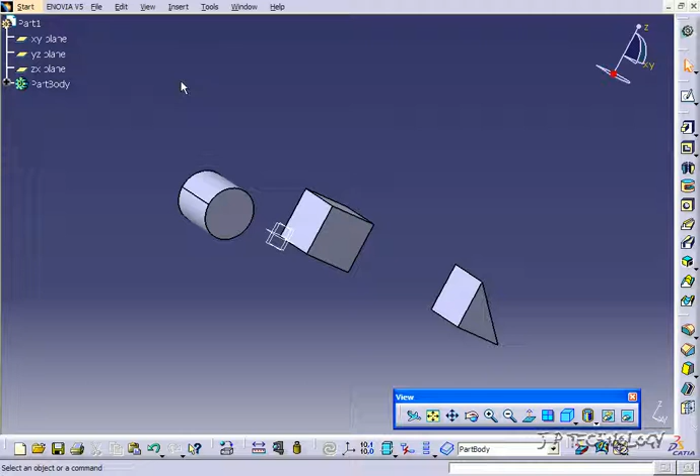This is tutorial number 43, and it covers how to use the drafted fillet pocket feature within Catia V5. To start off, open up tutorial part number 42, which is located on the DVD. Now the drafted fillet pocket feature is found either in your toolbar over here, or if you go to Insert, Sketch Base Feature, your drafted filleted pocket.

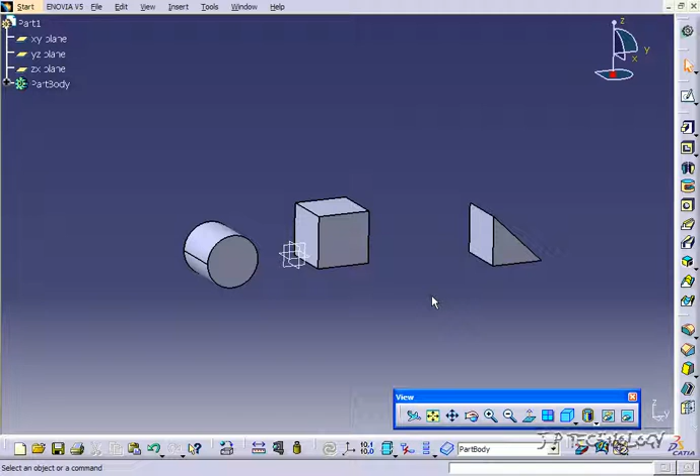Now what we're going to do is we're going to apply this feature to all of these parts here, and just like the previous tutorial on the pad one, the pocket one is going to incorporate a pocket, a fillet, and a draft all in one step with the one sketch. So again, this is going to save you time as it takes one sketch and one feature to complete 3 features all at once. So for the first one, let's click this face here, click Sketch, let's zoom in and let's draw a square.

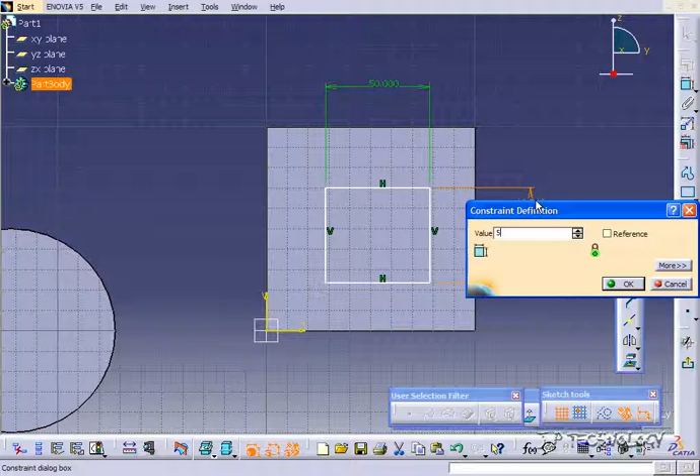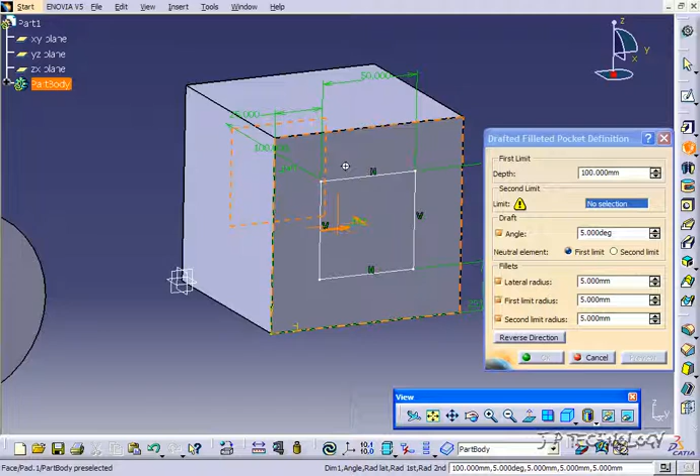And let's dimension the square to 50 by 50. And we'll center it. So it's going to be 25 by 25. So once you have all those dimensions in, let's go back up and let's click the drafted fillet pocket. So let's click it, and then again you're given the same menu as the pad definition. So for the depth, let's put it to 50.

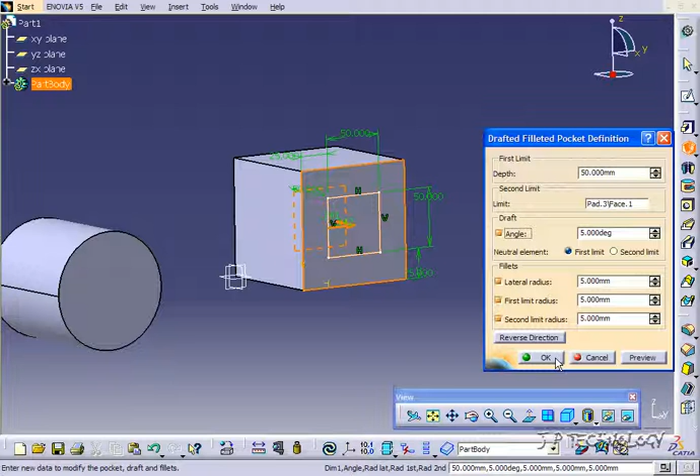For the limit, let's click this face here, and again you're able to toggle the draft and all the fillets on and off. So right now let's put everything on, leave everything at 5 degree and 5 mil, and let's click OK. And you can see that we've been able to cut into the block with a 5 degree draft on it, and all of the edges have fillets.

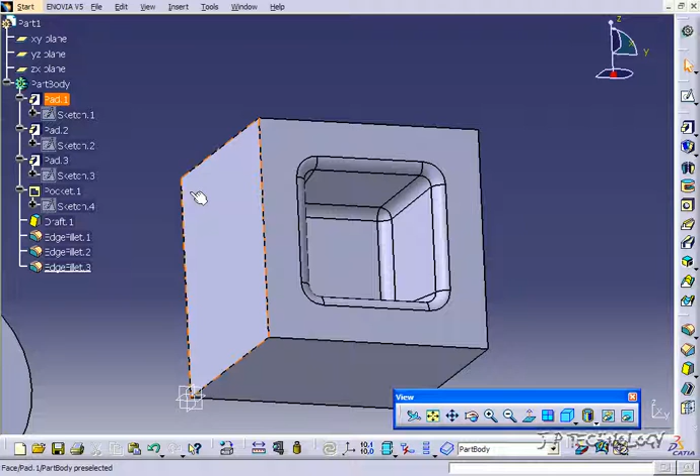Now if you open up the part body, under this pocket here, of course you're going to see the pocket, the draft, and the 3 fillets that we used. So again, we're able to go in and change some dimensions. So let's double click on the draft and let's change the draft angle for this one. Let's put it to 12 degrees. Click OK. And now you can see that it's opened up and we have a 12-degree draft on this pocket.

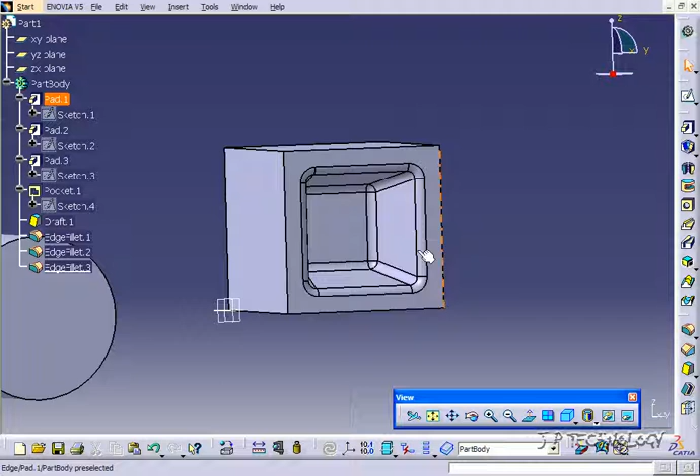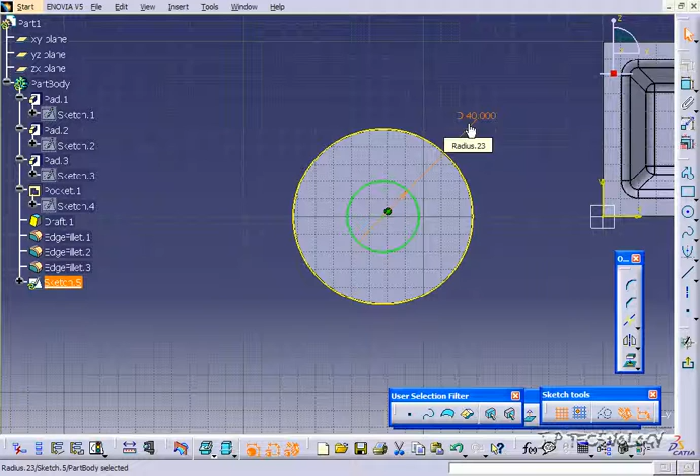Now let's do this on the circle. So let's click the circle here, click Sketch, and let's zoom in. Now let's project the outside circle, and let's do the inside circle at the center point. Let's make it a diameter of 40 and delete the outside circle now. We'll go back to the workbench and let's use the drafted filleted pocket again.

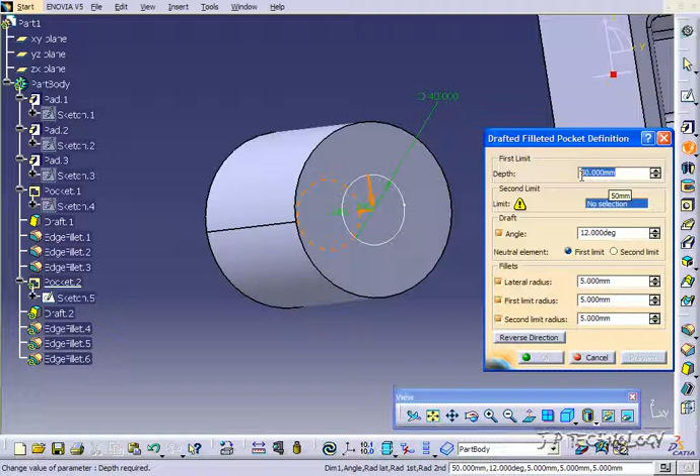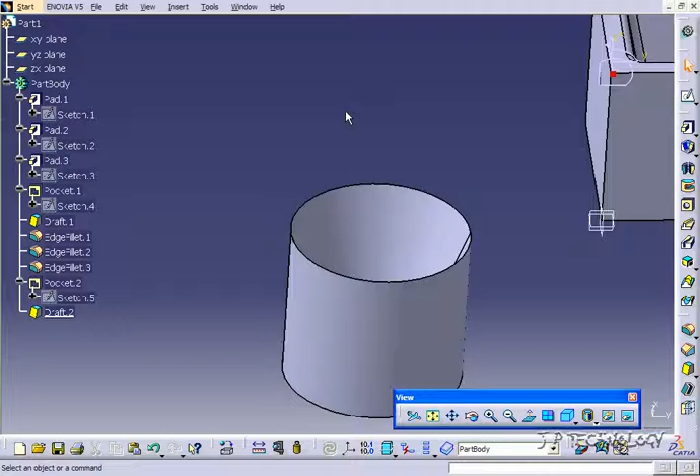Now you're able to change the depth again, so let's change this depth for this one. Let's make it farther down into it, so let's make it 50. And for the limit, we'll click this face here. Now for the draft angle, let's put the draft angle to 20 degrees, and let's take away all of the fillets. Click OK, and now we've drafted the pocketed cut 20 degrees into our pad.

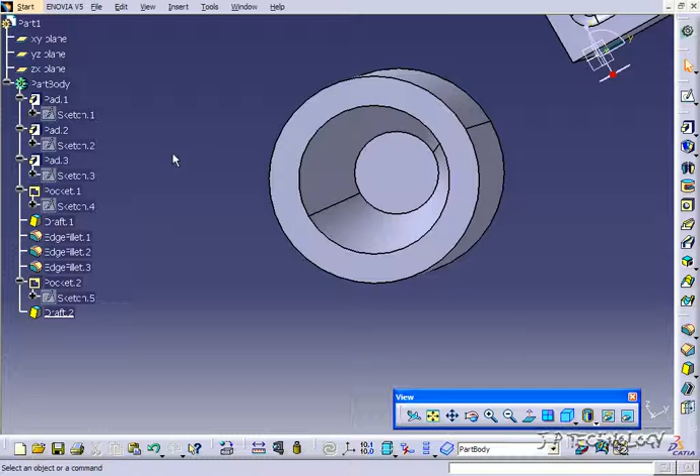Now let's double click on this draft and change the angle. Let's put it to 10 degrees, click OK, and now we've changed it to 10 degrees. So now there's no fillets or anything on it, it's just the draft and the pocket. Now let's go to our last one here. Let's click this face here, click Sketch, and let's draw a profile here. So just draw a unique little profile along here. Click Tools and make sure that it's closed, and it's closed.

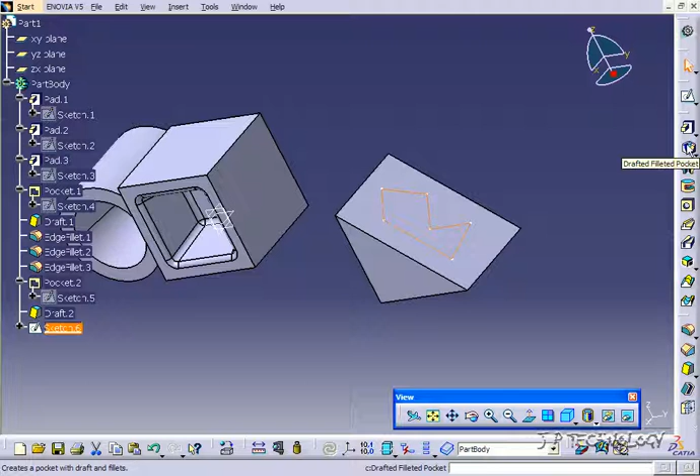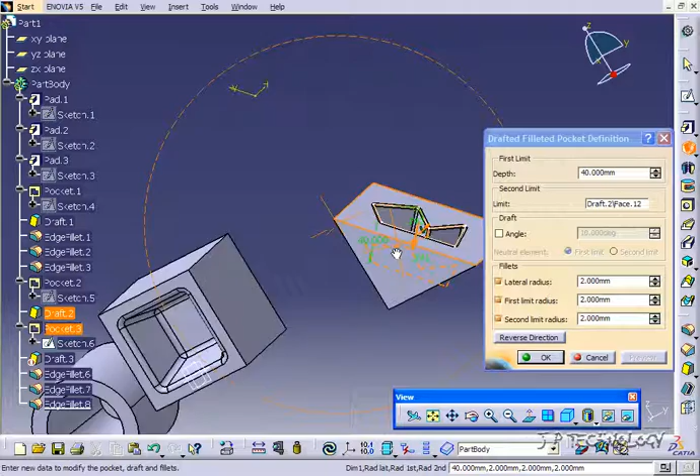And let's go back. Let's click the drafted filleted pocket again. This time let's uncheck the angle. And for all the radii, let's put 2. And for the depth, let's make it 40. And for the limit, let's click this face here, click preview, and we're going to get a little preview so we can see what's going on in there.

And let's change some of these fillets and see how it affects it. So let's change this one here back to 5. Click enter. And now you can see that all those corners there are bigger at 5. And again, we didn't have a draft, so all we have is the pocket and the fillets. So let's change some of these fillets.

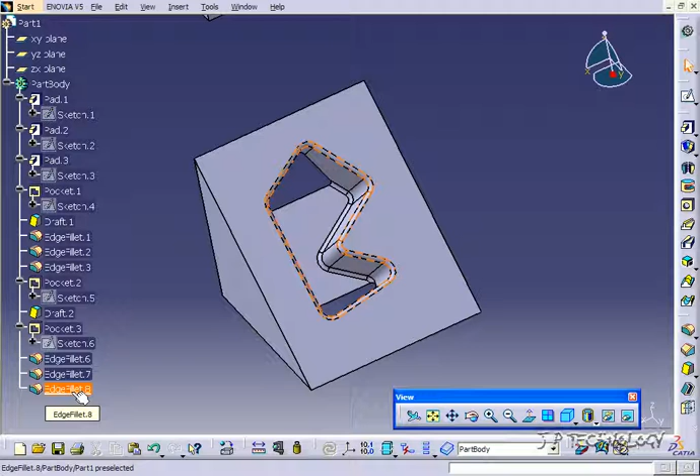So the one around the rim here, fillet 8, let's double click on it. And let's change this to 7. And let's see if it'll work. So let's click preview. And it appears that it's going to work, so let's click OK. And now we've changed that fillet to 7.

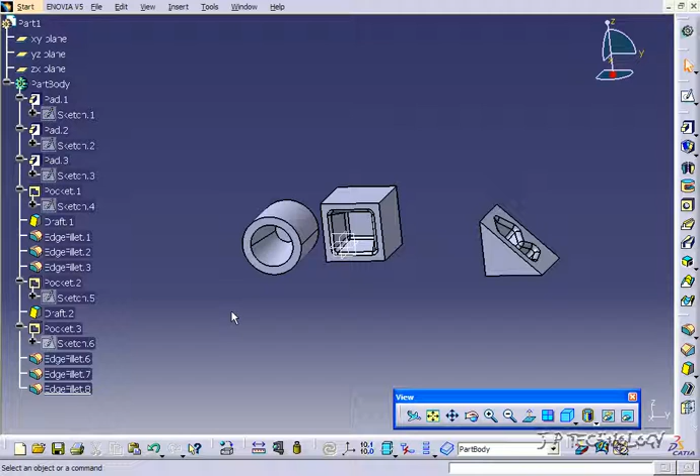So again, with this tool, it's a time saver, as it allows you to do the pocket, the draft, and the fillet all at once from the one sketch. So after you do it, you're able to also go back and edit either the pocket, the draft, or any one of the fillets. And that concludes our tutorial on how to use the drafted filleted pocket feature within Catia V5.